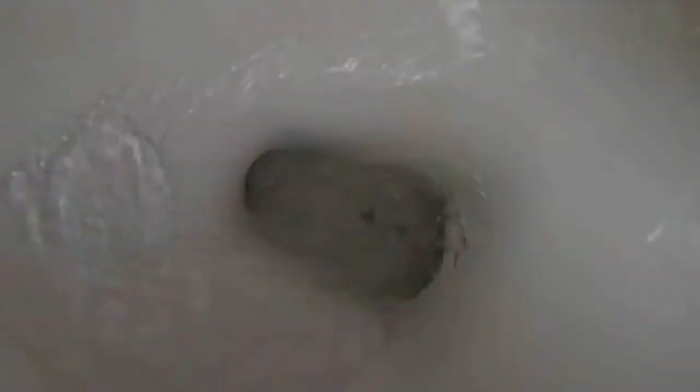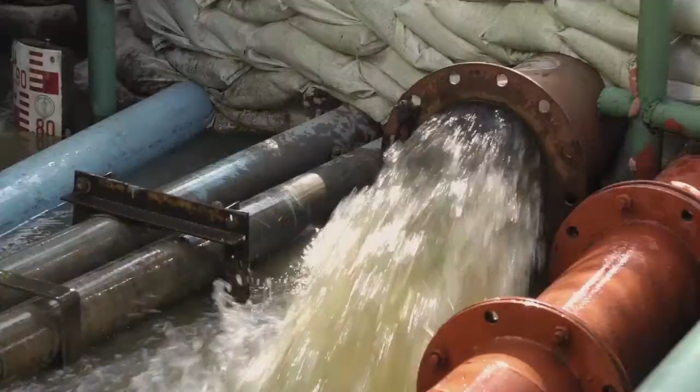When we use a flush toilet at home, many of us do not think of it as a luxury or a privileged experience. Yet, more than half of the world's population does not have access to safe and sanitary toilets. Since sewerage sanitation requires a lot of embedded infrastructure to support it, many nations cannot afford to properly treat human waste, which, in turn, becomes a source of pollution, inflicting numerous people with preventable diseases, causing suffering and impacting human dignity.

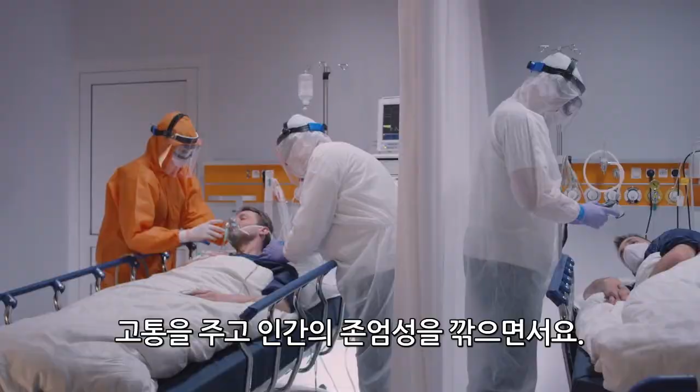That is why we create, for a safe tomorrow for you and us, the Reinvented Toilet. The Samsung Advanced Institute of Technology and JSTEC have collaborated in the development of this product. The first 10-person V1 RT prototype developed by Samsung Advanced Institute of Technology was delivered to JSTEC in December 2020, where further tests and developments were carried out for the new versions.

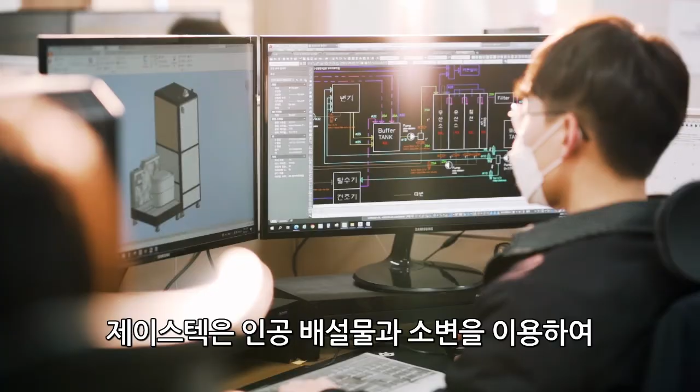We continued the development and testing of the Reinvented Toilet using synthetic human feces and urine. The datasets procured from these tests were taken for the V2, a new model, to test the treatment of real human waste. The testing of the V2 provided additional improvement to the system. This model has been in operation since June 2021. Currently, JSTEC's V2 is the only RT used in the field for more than half a year.

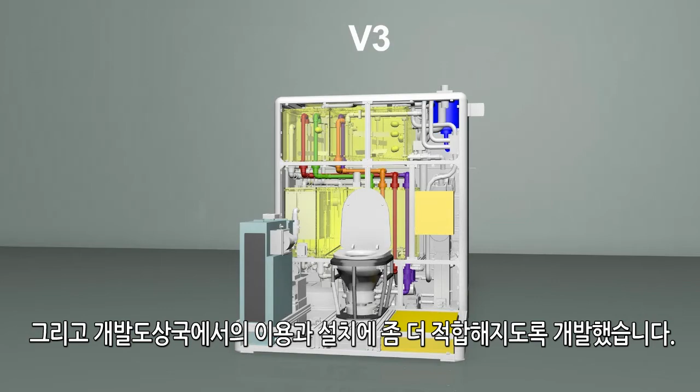The V3 was built to reduce the size, weight, and energy consumption of the original versions and be more compatible for use and installation in developing countries. Along with the V2, the two V3 units are also being tested with real human feces, and they have been in operation since October 2021. By comparing the performance of the two models, the strengths and weaknesses of each model are being identified and evaluated.

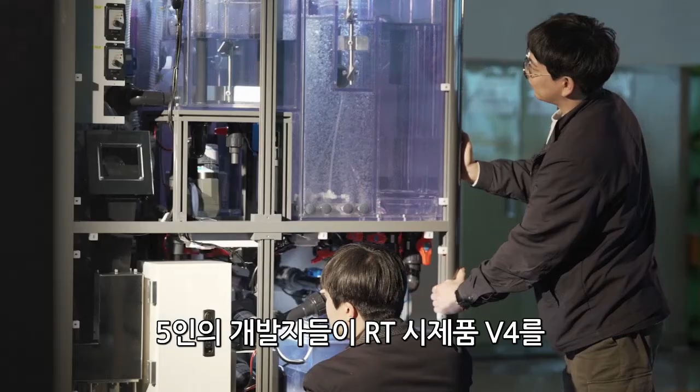To further improve the performance of RT and their size, weight, and energy consumption, a 5-person RT prototype V4 was developed based on user feedback from the V2 and V3 models. The latest design changes have also been incorporated into the V4, and it is now undergoing user testing in relation to the safety and performance requirements in ISO 30500.

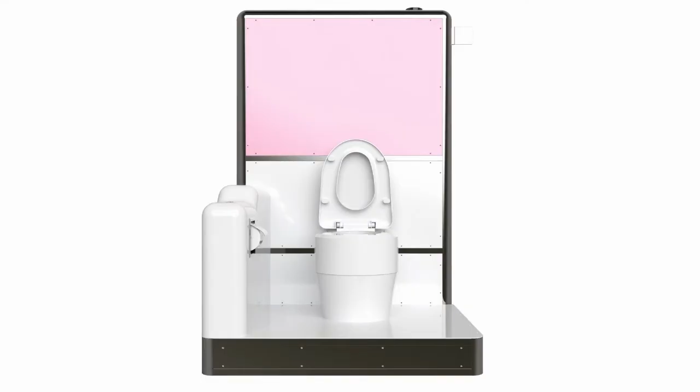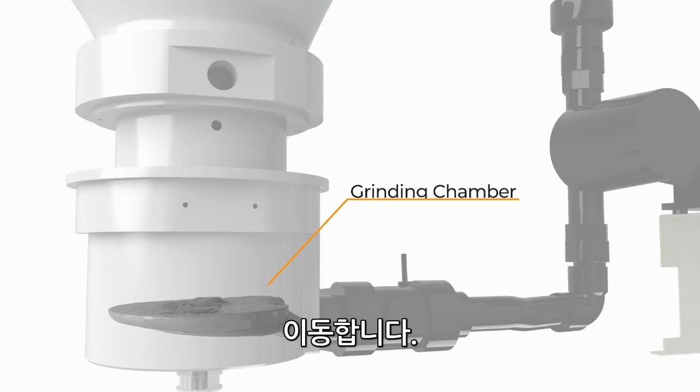As excrement is put into the toilet, the user presses the flush button to let flushing water flow into the toilet bowl. The liquids and solids are separated in the toilet bowl, and then the solids are transferred to the grinding chamber and the buffer tank located under the toilet. The ground waste is pumped into the anaerobic digester tank to be bioprocessed.

Here in the anaerobic digester, microorganisms digest them. Then the treated solids are transferred to the hopper tank. After the process of dehydration and drying, the waste is then incinerated, discharged as ashes.

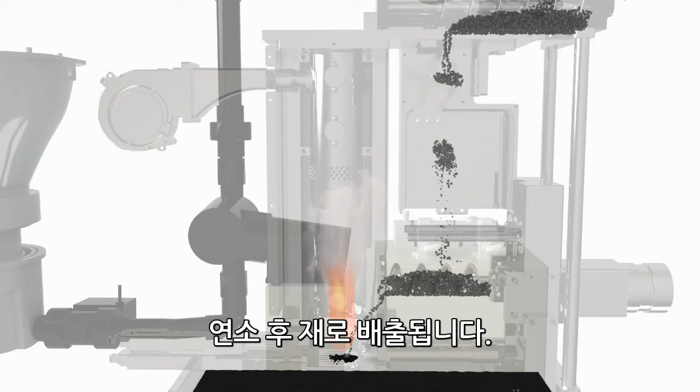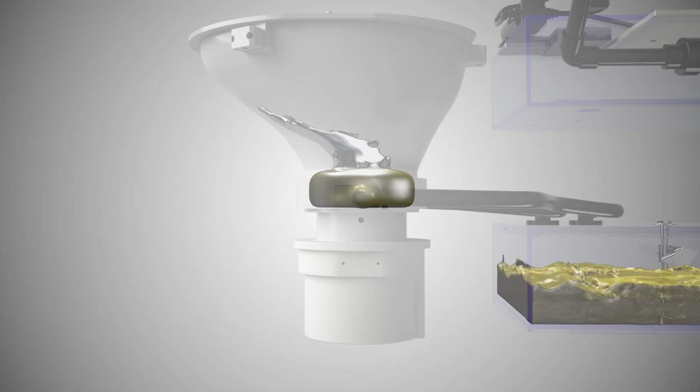As this happens, what processes are the liquids going through? The separated liquid is collected in the buffer tank first, and then transferred to a bioreactor where the waste is treated by microorganisms by continuous anaerobic and aerobic processes.

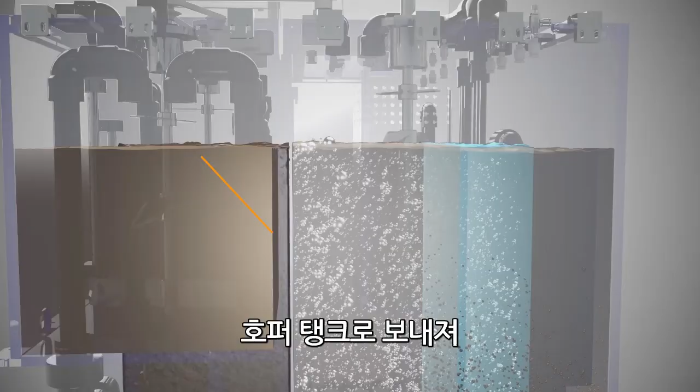Finally, the treated solution is moved to a precipitation tank. While the microbial sludge that is settled at the bottom of the precipitation tank is transferred to the hopper tank to join the solid treatment process, the purified liquid is transferred to the disinfection tank for the sterilization process using ozone and UV. Finally, the sterilized liquid is recycled and used as flushing water.

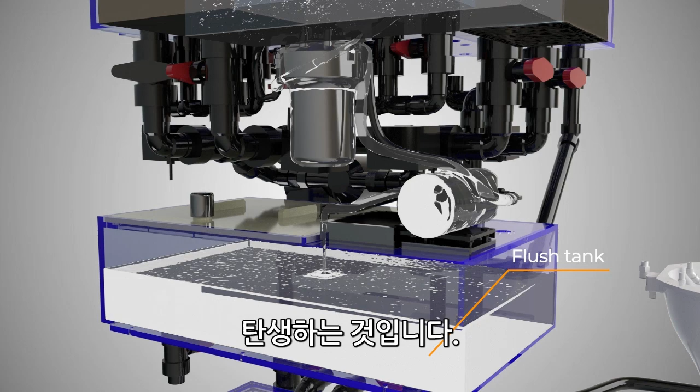Through RT's treatment processes, the outputs are made safe for human and environmental health. Foul odor is eliminated, and the water can be reused for flushing a number of times.

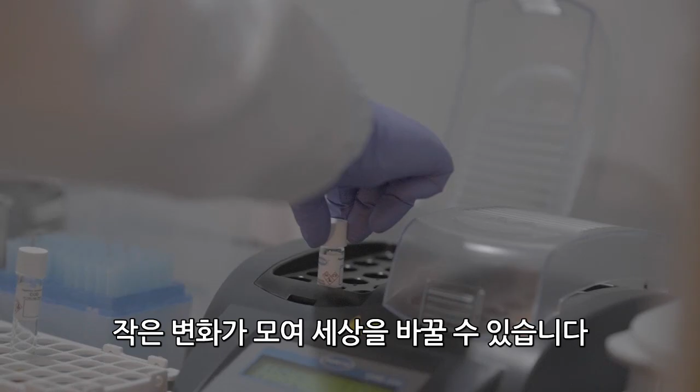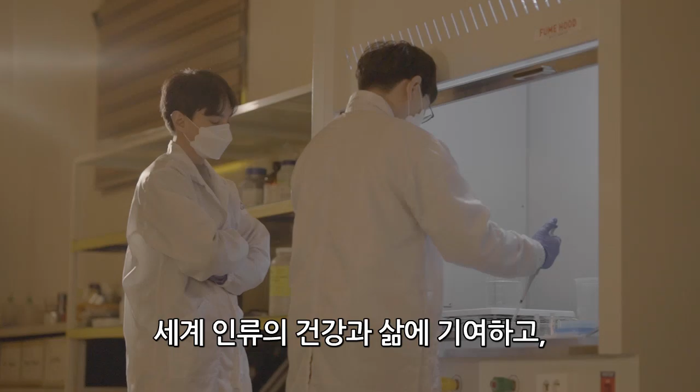Just as microorganisms shake up our lives, we believe that a safe and sanitary toilet at each home can change the world. Thus, we strive and are motivated to overcome countless challenges to develop and deliver a new, revolutionary toilet that can safely treat human waste on-site. If we can do that, we can help billions of people live a healthier and more productive life.

The Reinvented Toilet. It will save many lives and create a new world and future. JSTEC.